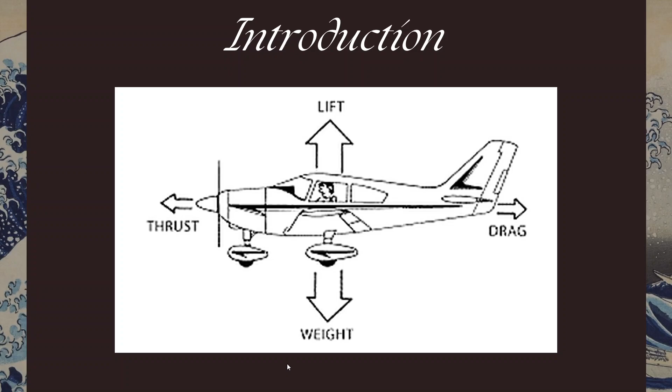When we say power plant, as of now we have two types of power plants used for aircraft. We have the reciprocating engine, which is used for light aircraft, for General Aviation. And then we also have the gas turbine engine, which is used for commercial aircraft. In our course, Power Plant 1, throughout our course we will focus only on this reciprocating engine used in light aircraft.

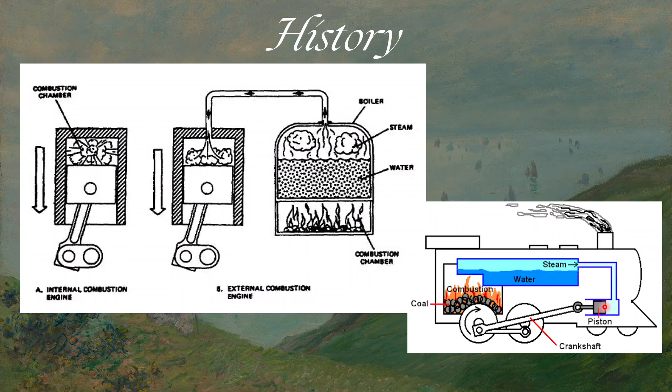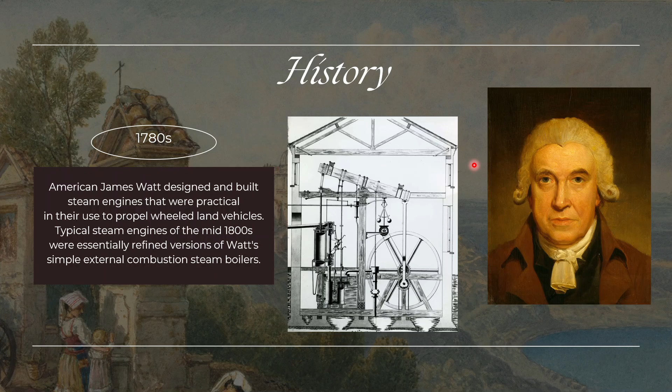Let's just skim through this - you can read it on your own for detailed information. Before, by the 1780s, James Watt designed and built a steam engine that was practical for use, usually used for wheeled land vehicles. Typical steam engines of the mid-1800s were essentially refined versions of Watt's simple external combustion steam boilers. So the steam engine, the external combustion engine, originated from him.

By 1808, Englishman Sir George Cayley, considered the father of aerial navigation, the most notable thing he did was use gunpowder - he burned gunpowder for his calorific engine.

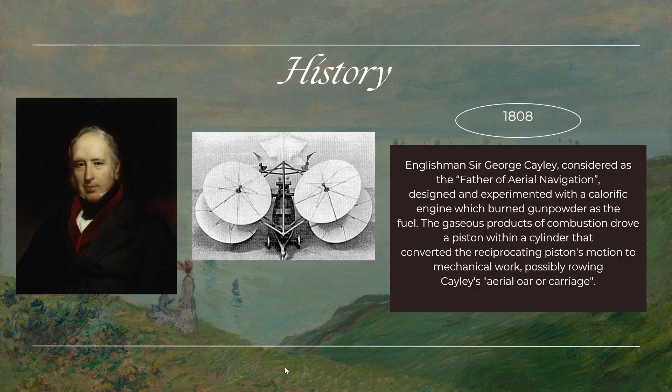In 1857, Felix du Temple of France had a toy model before, powered by a wound spring - a clockwork powered model. When he tried to build a full-scale model of it, he used a hot air engine, since the steam engine available at that time was too heavy, and the gasoline engine or internal combustion engine was not yet established. It operated similar to a steam engine, but it didn't propel itself - it was only considered a powered hop.

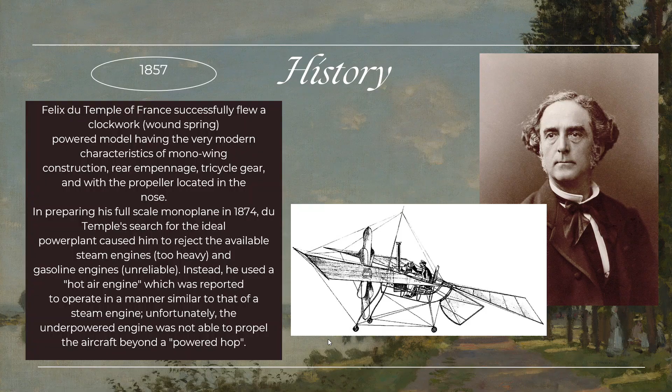By 1848, Englishmen William Samuel Henson and John Stringfellow had a model. They used their own miniature steam engine, which had two propellers, an engine, and gearing.

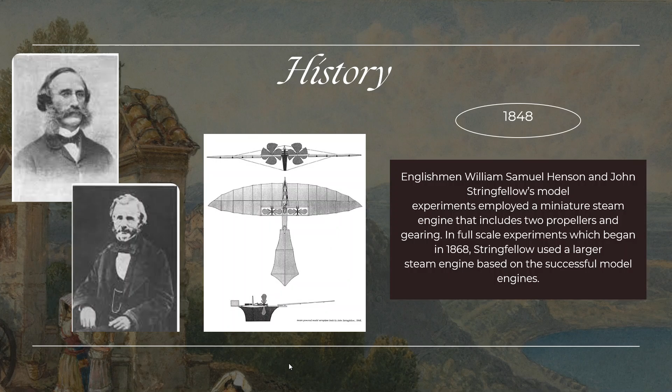By 1869, there were French brothers who attached a steam engine to a bicycle, creating their first powered motorcycle.

In 1879, Russian naval officer and engineer Alexander F. Mozhayski used a steam engine with 10 and 20 horsepower for his flight experiments. He successfully flew his steam-powered full-scale aircraft, accomplishing a powered hop but not truly a powered flight as had been claimed by the Russian government - it was only considered a powered hop although he did fly it.

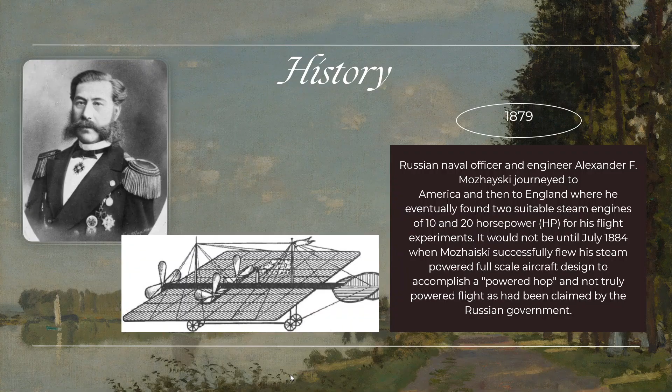1890, French inventor Clement Ader also conducted flight experiments in his steam-powered aircraft. So, kiniklaim din na it was the first successful, or he's the first man to have successfully flown a heavier than air aircraft. His later efforts, also funded by the French War Ministry, resulted in the October 1897 flight of the Avion 3, which is a bat-winged aircraft powered by two 20 HP steam engines. So, external combustion pa rin. But sadly, hindi siya na-considered as flight kasi hindi raw sustained and hindi rin nakokontrol yung model.

1890, Samuel Pierpont Langley, meron siyang model. Tinatawag niyang aerodrome. So, nag-utilize nung steam engines, small steam engines. His highly successful flights of the model aerodrome number 5 utilized a 1 horsepower steam engine. And then his later efforts in manned flight with his full-scale aerodrome, however, used a gasoline-powered engine. So, after some years na to, wherein established na yung reciprocating engine or yung internal combustion engine or yung gasoline-powered engine. And then it became apparent over time that after the many attempts by numerous inventors, that steam-powered engines were far too heavy and produced insufficient power for aircraft. An alternative source of power would have to be found.

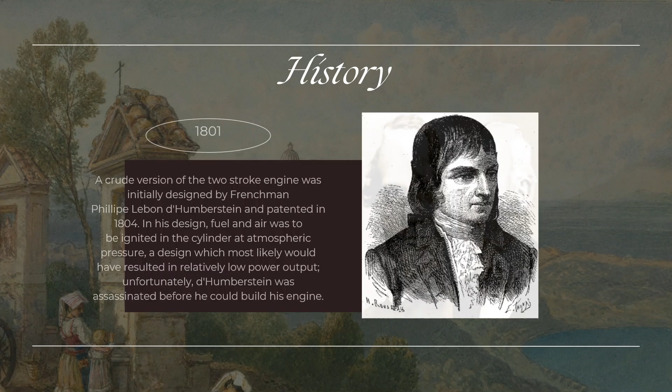So, by 1858, si Frenchman Etienne Lenoir, if I'm not mistaken, so fascinated by inventing useful devices, he began his work in 1850 on a new type of engine that electrically ignited lighting gas, typically used for street lamps, with atmospheric pressure air, thereby producing the expanding gases that could be harnessed for the generation of power. So this engine was completed in 1858 and patented in 1860. And one such engine was fitted to a cart, creating the first direct predecessor though a very crude iteration of the automobile. So yung gawa niya, considered as the first internal combustion engine.

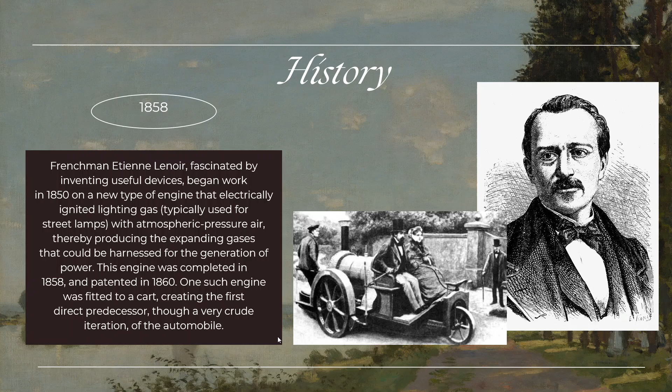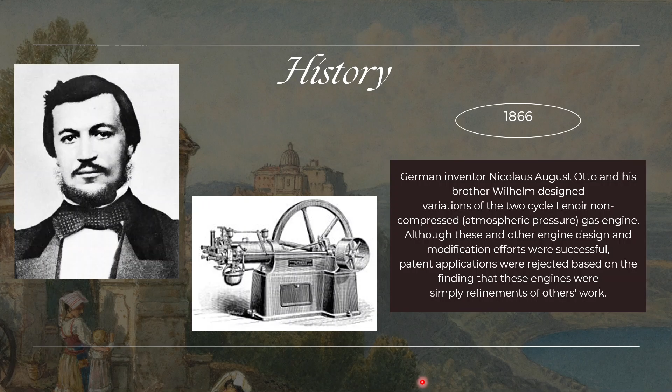And then, by 1866, so ito na yung nalalaman natin ngayon, German inventor Nicolaus August Otto. So sa kanya nanggaling yung Otto cycle natin, basis dun sa four-stroke engine na reciprocating engine. And his brother Wilhelm designed the variations of the two-cycle Lenoir non-compressed atmospheric pressure gas engine. So although this and other engine design and modification efforts were successful, patent applications were rejected based on the finding that these engines were simply refinements of others' work.

So the Otto brothers then made the critical technical advance of compressing the fuel and air charge before it entered the cylinder. And then later on, Nicolaus Otto reorganized his company with Gottlieb Daimler as president and Franz Rings as chief engineer. Rings' most important contribution was to discard the free piston idea and to focus on one of Otto's engine concepts, the four-cycle engine. So before kasi two-cycle or two-stroke lang. But then sa kanya, four strokes na. So four-cycle.

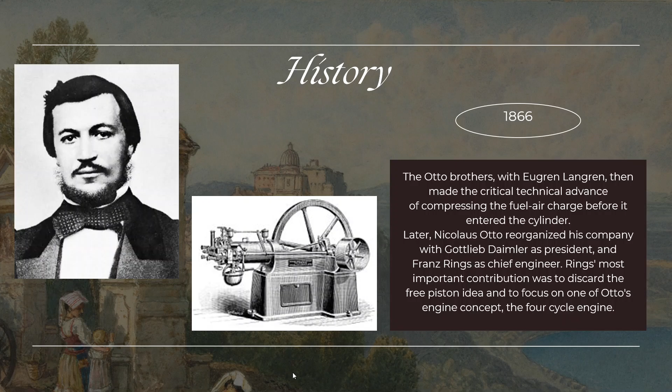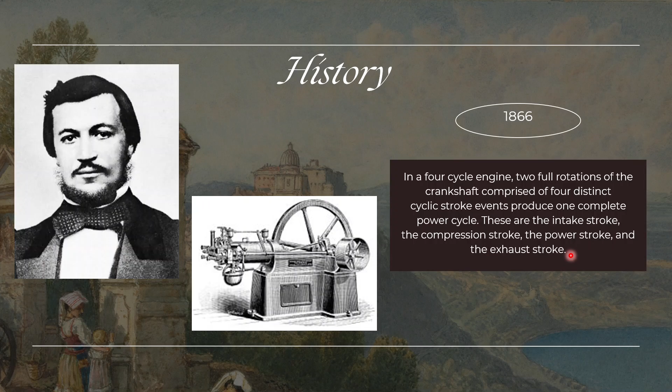So in a four-cycle engine, two full rotations of the crankshaft comprised of four distinct cyclic stroke events produce one complete power cycle. So ito na rin yung ginagamit natin ngayon, yung idea dito. So these are the intake stroke, the compression stroke, the power stroke, and the exhaust stroke.

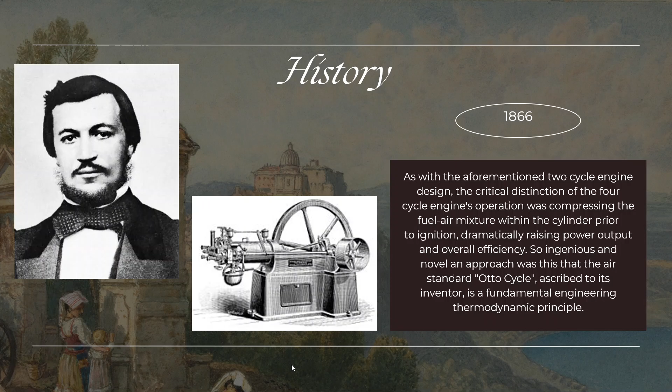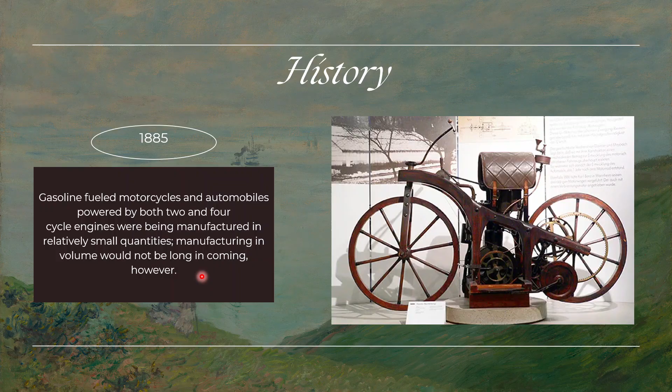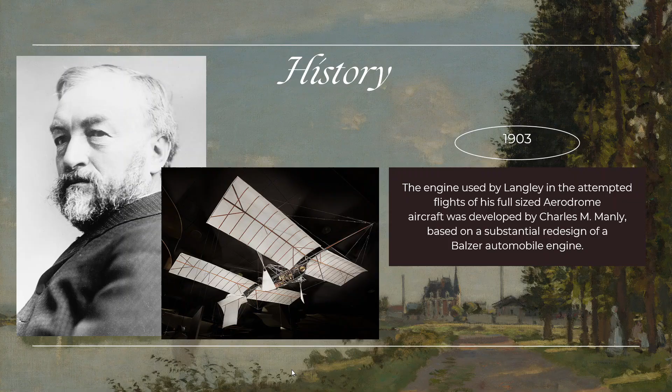And then also, the same year, ito na yung first recognized na flight. So, by Wright brothers. So, they used horizontally arranged inline four-cylinder. Basically, ano lang siya, internally combustion engine. So, yun yung ginamit nila sa Wright Flyer nila for it to fly.

1904, si Langley ulit. So, meron siyang further aerodrome experiments. Before, nag-utilize siya ng steam engine, but his later efforts in manned flight with his full-scale aerodrome used a gasoline-powered engine. So, it became apparent over time after the many attempts by numerous inventors that steam-powered engines were far too heavy and produced insufficient power for aircraft. So tulad na na-mention kanina, an alternative source of power would have to be found.

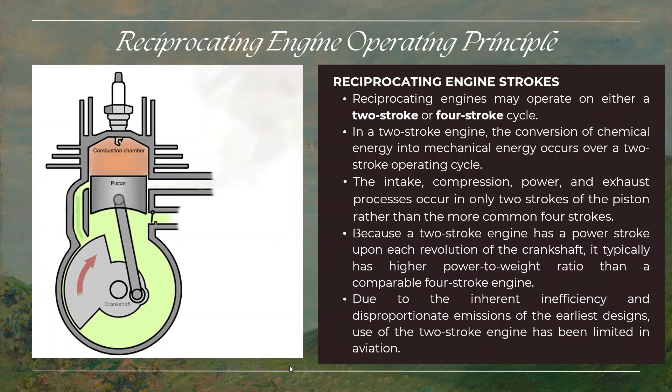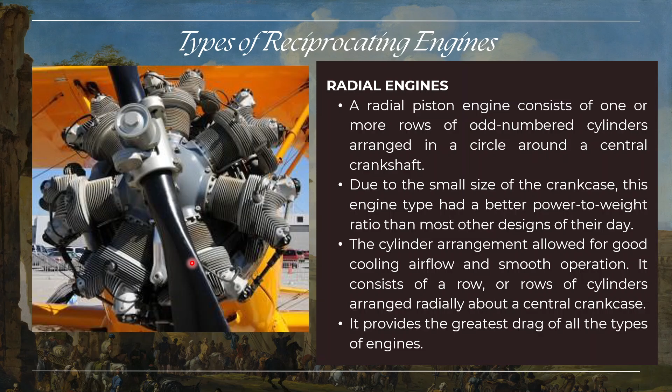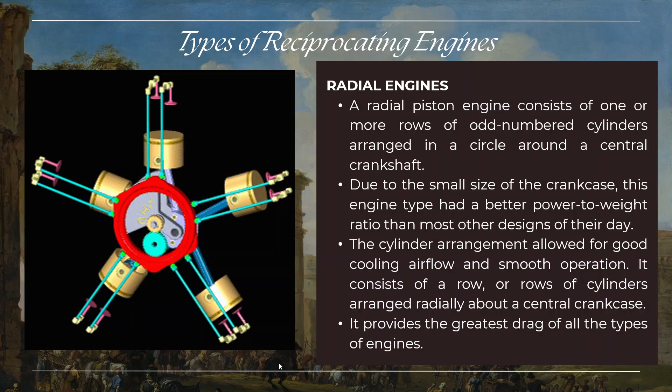Next type is the inline engine. So, it is also called a straight type engine because of its cylinder arrangement. So, yun nga, kung kanina, radial engine, paikot sa crankshaft. Dito is pahalang, pa-straight siya, straight line, yung arrangement ng cylinders and ng pistons. So, this engine may be either liquid cooled or air cooled. So, lahat naman possible, air cooled or liquid cooled.

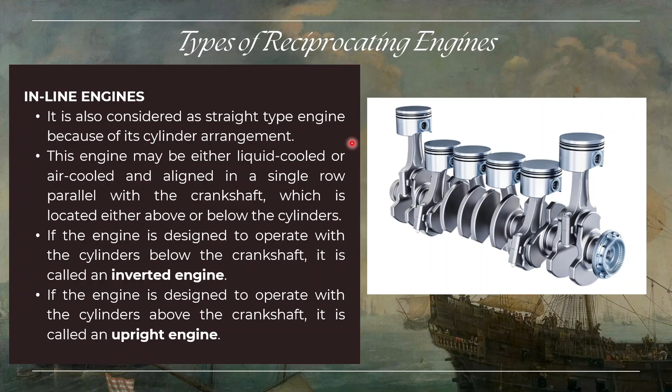And aligned in a single row parallel with the crankshaft, which is located either above or below the cylinders. So, kapag yung cylinders ay nasa baba ng crankshaft, it is called an inverted engine. Kapag nasa ibabaw naman ng crankshaft, it is called an upright engine. So yan, inline, naka-straight lang yung arrangement ng cylinders and pistons. So isang row lang siya.

So ayun nga, meron siyang small frontal area unlike dun sa radial engine. So it is better adapted to streamlining para nakaka-help sa pag-reduce ng drag. So with increase in engine size, the air-cooled inline type offers additional problems to provide proper cooling. The rearmost cylinders of an air-cooled inline engine receive relatively little cooling air, so inline engines were typically limited to only 4 or 6 cylinders.

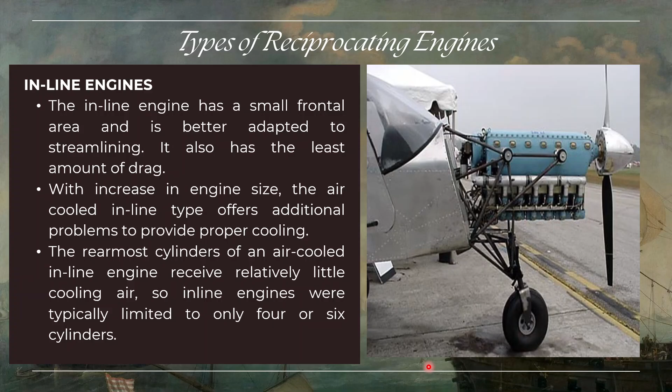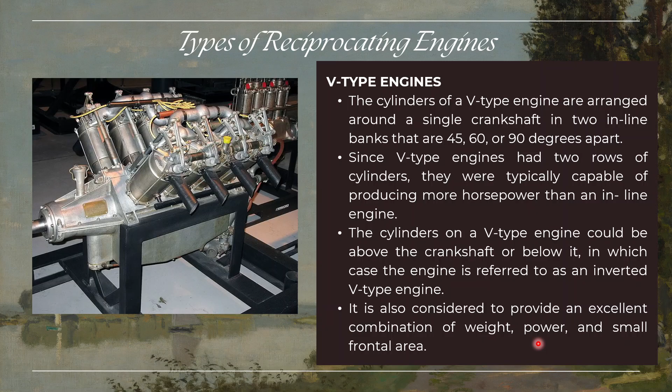And then, the cylinders on a V-type engine could be above the crankshaft or below it. So, similar sa kanina, kapag nasa baba, it is called an inverted V-type engine. And also, it is considered to provide an excellent combination of weight, power, and small frontal area.

Last, horizontally opposed engines. So, these are the most popular reciprocating engines used on light aircraft today. It is also considered as a boxer type or flat type engine. It always has an even number of cylinders, and a cylinder on one side of a crankcase opposes a cylinder on the other side.